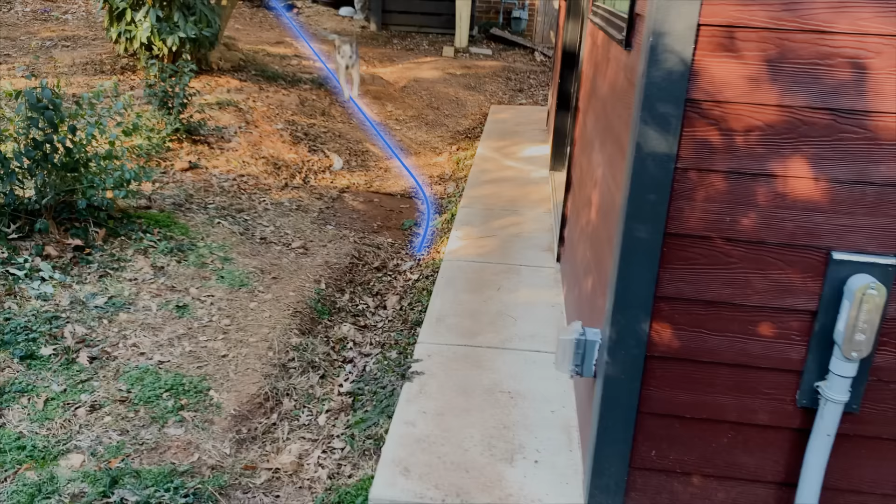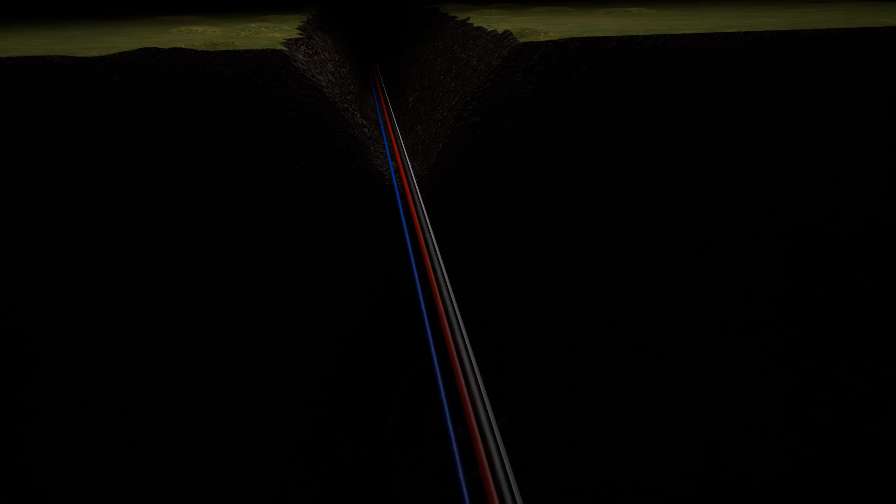My wife and I have just finished building this backyard office ourselves, and today we're going to be covering a very important step: connecting high-speed fiber internet. We'll explore some of the options that were available to us before getting into the details on the products we used and the amount we spent. We're also going to look inside some of the components of a home network, using VFX and animations to help explore their basic functionality. As always, I'm aiming to give you as much information as possible, so you can recreate this project, or at least take some ideas for your own. The final result will be a wired gigabit connection available at both workstations in this office. So let's get started and take a look at how we can integrate into our existing home network.

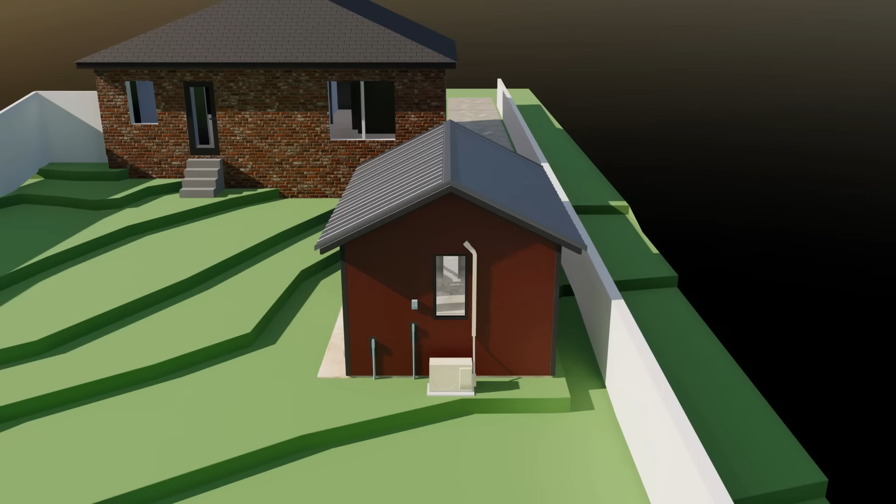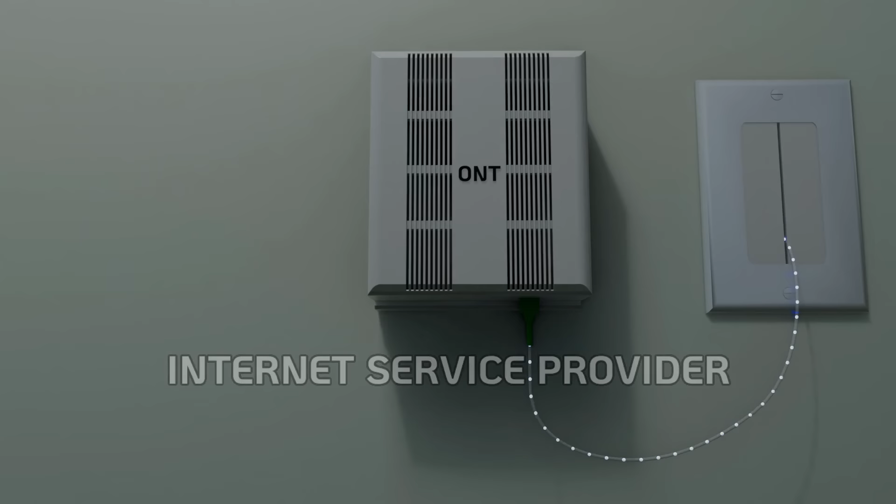Over at the house, we are fortunate to have a gigabit fiber connection with our internet service provider. This feed enters our home through the crawl space and runs to the center of the house, where I have a media closet set up. The fiber comes up through the back wall of that closet and plugs into the first device, the Fiber Optical Network Terminal, or ONT box, which is property of our ISP. This box takes the light signals transmitting over the fiber line and converts them into electrical signals, which can be sent through the copper wires of an Ethernet cable.

The next device is an Ethernet gateway, also property of our ISP. It has two functions. The first is converting the analog signal it's receiving from the ONT box into a digital signal, which is what our phones and computers will use. It also acts as a router, which is what allows multiple devices to simultaneously access the internet.

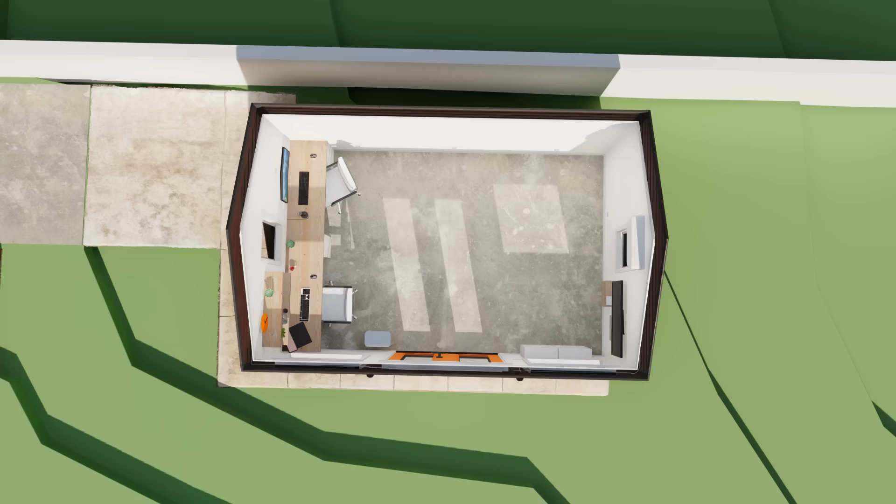For my new office out in the backyard, I'll need to find a way to get access to this gateway. It provides Wi-Fi, but the signal is going to be way too weak to reach a separate building. Let's consider a few different solutions to bridge the gap.

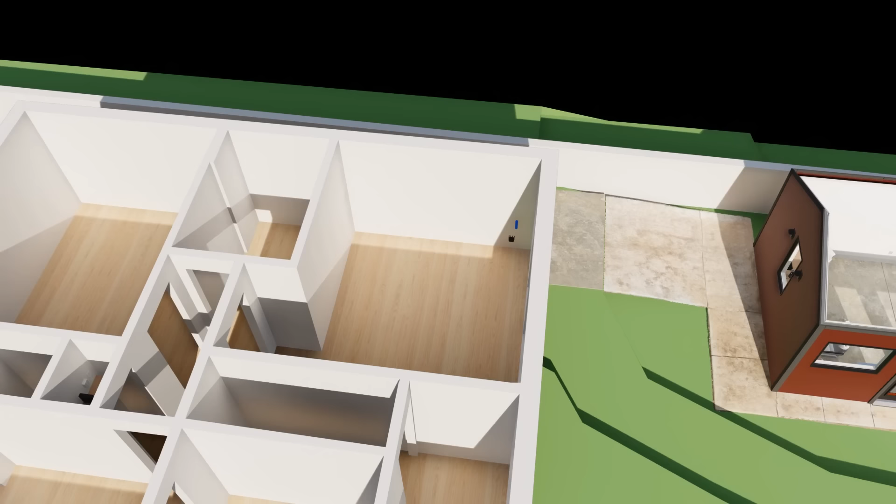The first is a Wi-Fi extender. This device simply takes the Wi-Fi signals it's hearing from the gateway and repeats them so devices further away have a chance to pick them up and communicate back. The downside is we'll see a pretty big reduction in our internet speed. We're adding a middleman, and the time it takes this device to listen and then retransmit will result in a noticeable speed decrease.

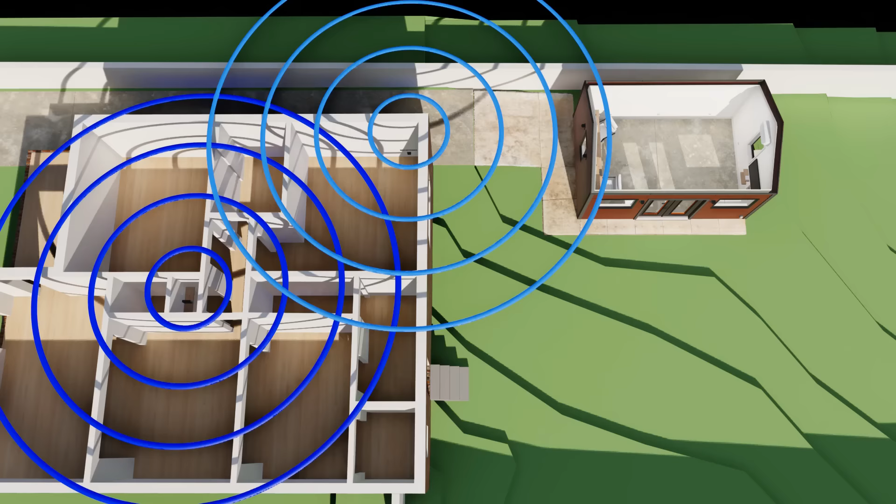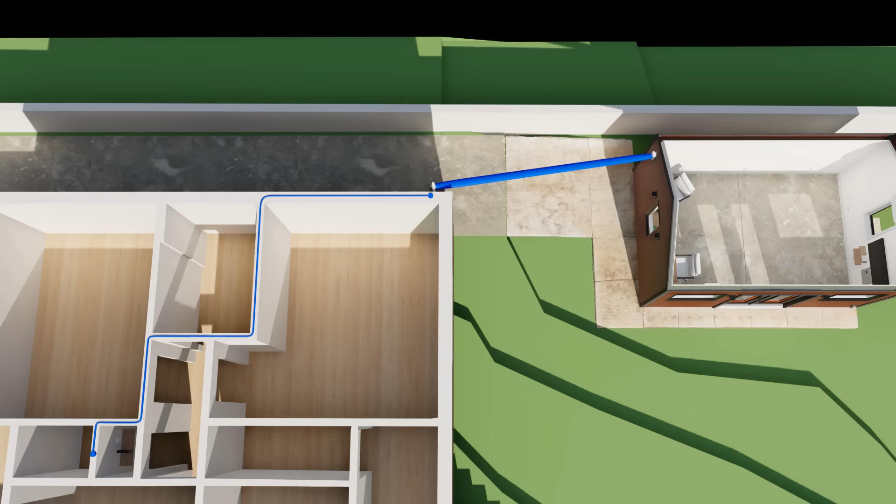The next option is what's called a point-to-point wireless bridge, which is pretty common in a situation like ours where you have two separate buildings. Instead of boosting the strength of our existing network, we would create a separate network out in the office. This new network communicates with the house using a pair of specialized antennas that transmit a focused signal back and forth between the two buildings. This does require a line of sight, but it results in a more robust connection than the extender. While it is an improvement, it still isn't the fastest solution that we have available. And it can also be affected by bad weather.

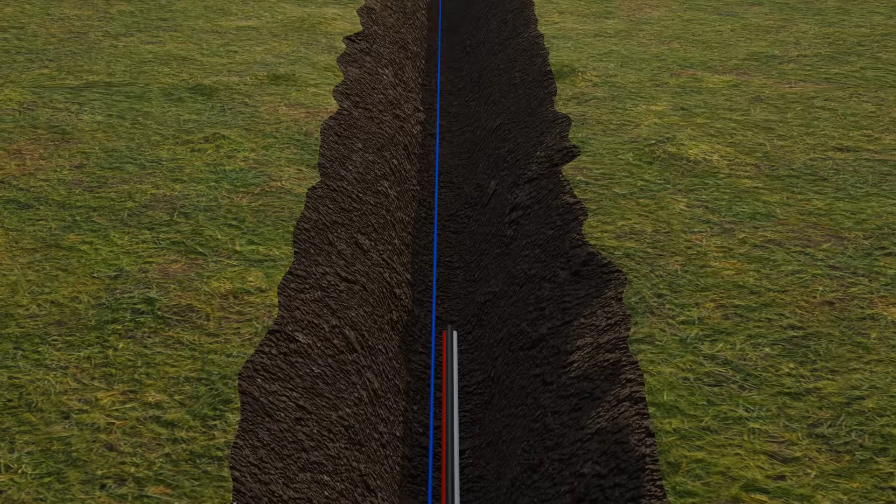A wired connection avoids all of this. If you're already running underground power, why not just take advantage of the opportunity and run a direct Ethernet wire out to the new building? But there's one issue: we don't want to run an Ethernet line right next to a 240 volt power line. When electricity is flowing through a wire, it produces a magnetic field which can induce currents in nearby wires. This is called electromagnetic interference, and it has the potential to corrupt data.

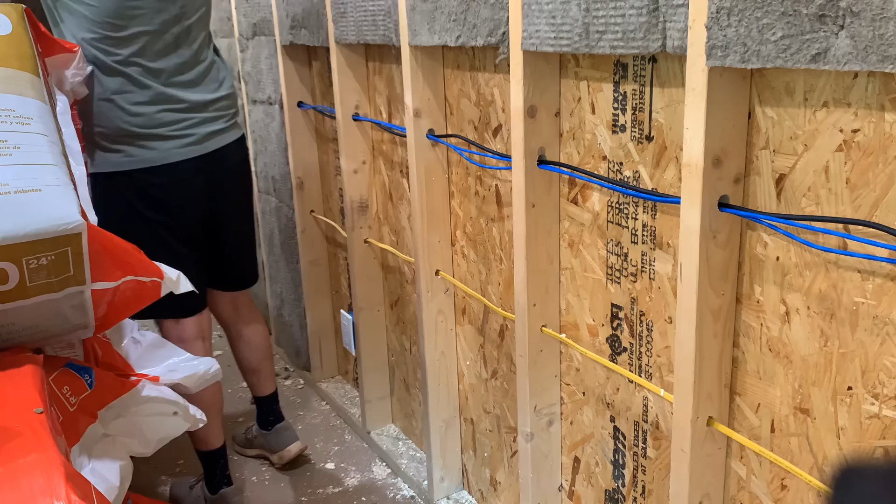This usually isn't a concern when you only have low voltage wires, which is why it's typical to see multiple Ethernet lines placed right next to one another. But it's definitely something you'll want to plan for whenever you're dealing with 120 volts or higher. This effect is diminished as the distance between the wires increases. For that reason, we have the Ethernet in our office walls running 12 inches above the 120 volt lines. But it's going to be difficult to create enough space between the wires in that trench. So what about fiber?

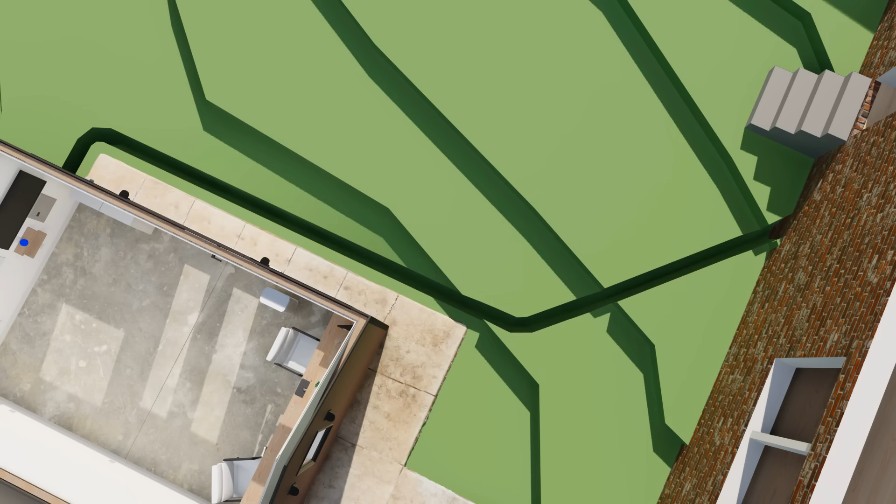Like we said earlier, these cables use light, not electricity, to transmit data. We'll be immune to the interference produced by our power cables, and we can use the same trench we already plan on digging. Fiber will also allow us to take full advantage of the high-speed internet available to us. It provides a much higher bandwidth than copper, so my wife and I will both be able to make the most of the wired connection at each of our computers without slowing each other down. This new line will run from the gateway out to the office where it will connect to an access point.

Now that we've decided on the overall plan, let's get into the specifics on the products that we intend to use.

Hey, could you help me with the project in the kitchen quick? Yeah, we can do that quick.

We're very excited to finish the backyard office, but it's also important to prioritize the simple projects that can have a lasting effect on your health.

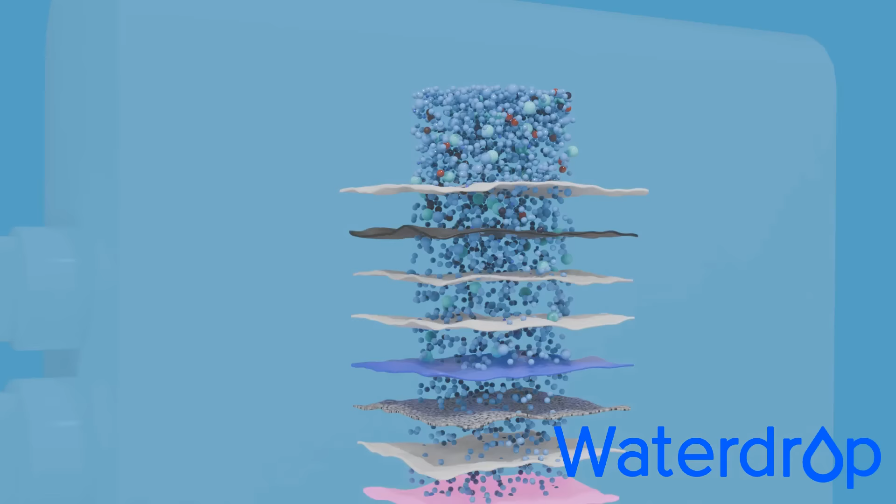We start by drilling a 1-inch hole in the countertop where we'd like to add our new drinking faucet.

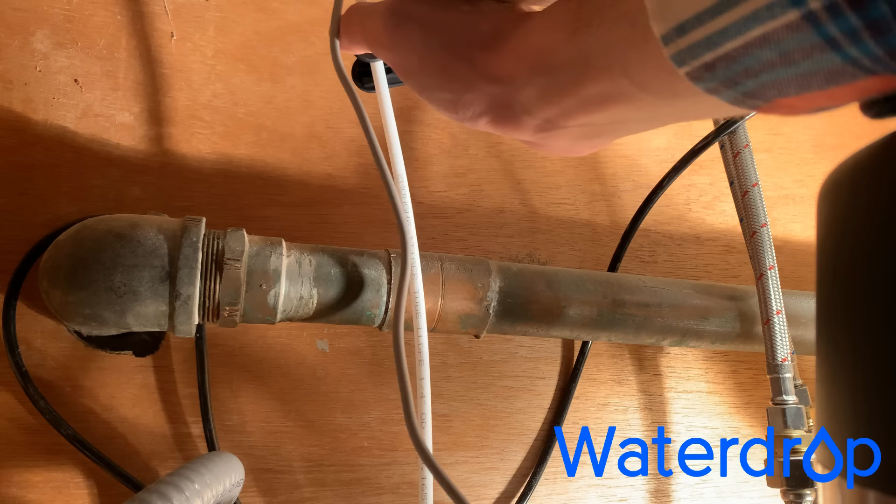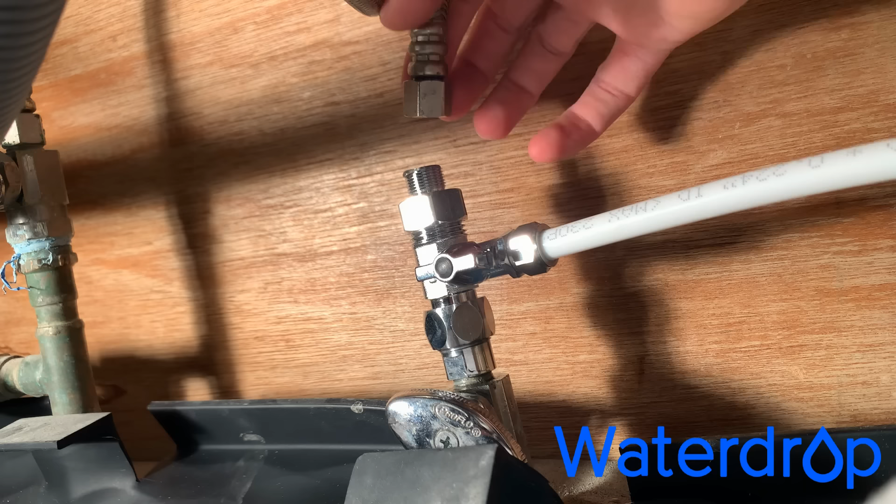Right below this, we'll have our UV sterilizer. This device kills bacteria and microorganisms that might be present in the water. Next, I'm installing this water line adapter, which connects up to our sink supply. You just want to make sure you shut off the water first and let the faucet drain any remaining water. For the filter's drain line, I'm adding this small connection to our existing sink drain pipe.

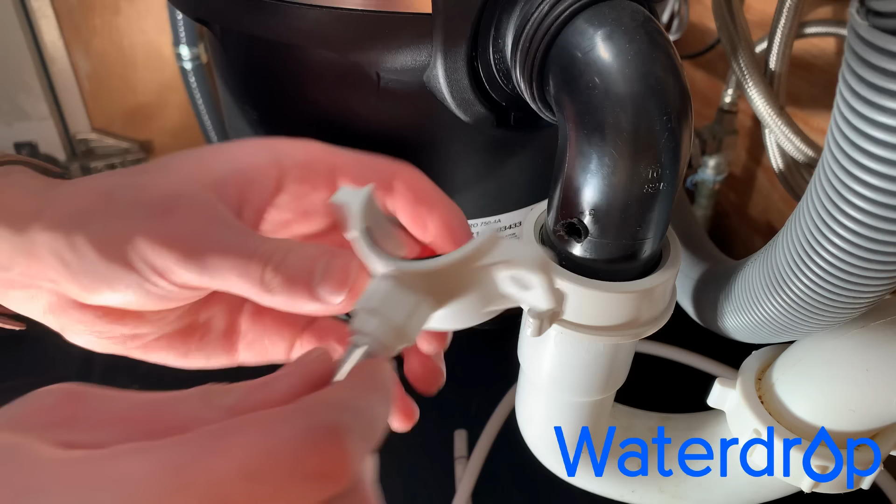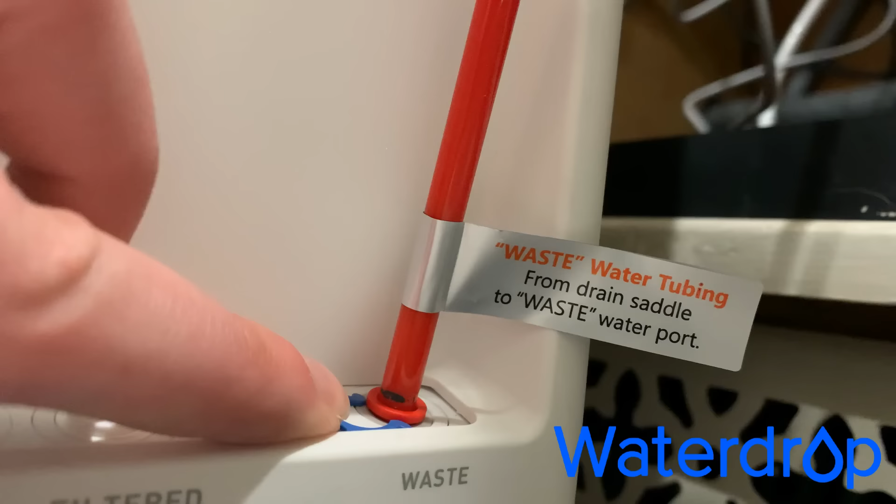Now we're ready to connect all of these components to the main device. It's all very straightforward, with everything pre-labeled and some lines drawn to help indicate when your tubes are fully seated. We then have the cables connecting the faucet and the UV sterilizer.

The device has 3 different filters that are easy to access from the front of the unit. This tankless design is very compact and fits nicely under our sink. We're really happy with this product. The faucet provides information on water quality as well as the status for each filter.

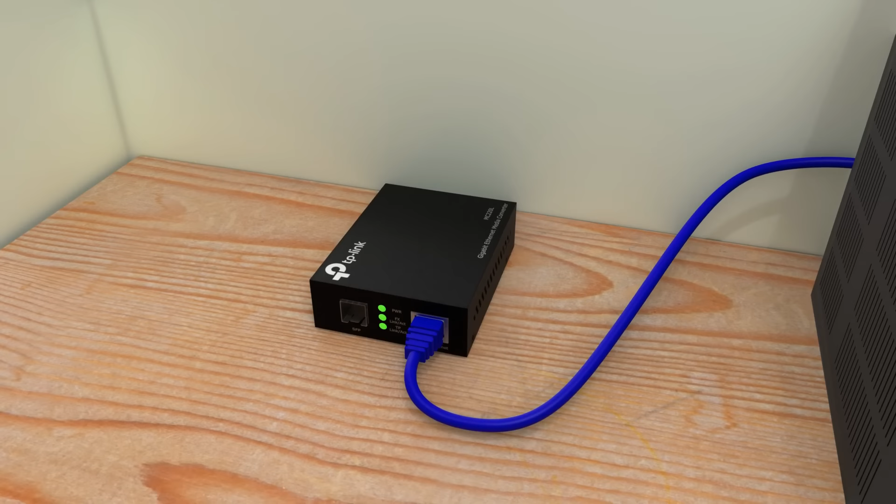Now let's get back to the details of our office network. Starting back at the media closet in the house, I'm going to connect a device to our gateway via Ethernet, called a media converter. Just like it sounds, this device is going to translate the electrical signals into light signals for fiber. The device has what's called an SFP slot, which is where we're going to make our fiber connection.

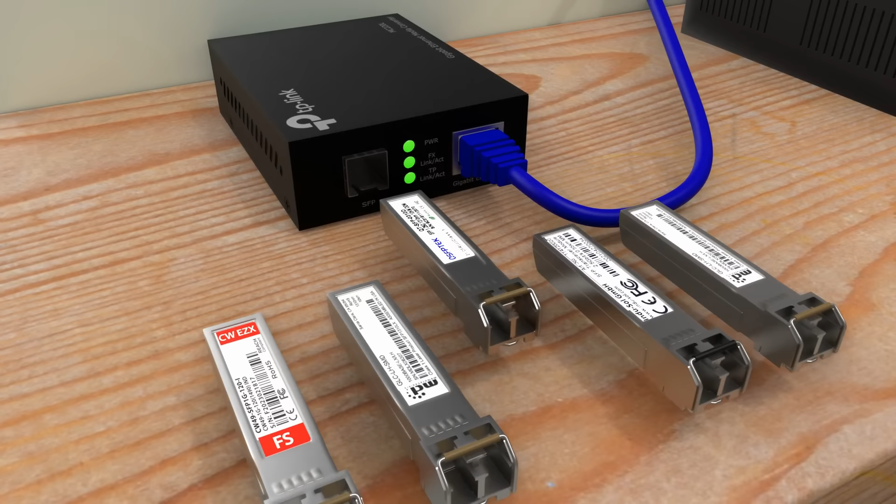When you select the type of fiber that you want to use, which we'll get into the different types here in a second, you'll need to get an SFP module that is compatible with that cable. It sounds complicated, but this module is just a practical way to make one media converter work with multiple different types of cable.

When you're selecting fiber, there's 2 main choices to pick between: multi-mode and single mode. Multi-mode has a thicker core and is designed to carry multiple streams of data at the same time. It used to be less expensive than single mode fiber, but it has a slower transmission speed and can't be run for long distances. Single mode has a much smaller core, allowing the signal to travel further and faster.

The price between the two has become so close recently that it's a pretty easy decision to go with single mode. This is also allowing me to future-proof the setup because the single mode cable can go up to 40 gigabits per second. I'll just have to update the media converter later to upgrade to the faster speeds.

The cable I'm using is an OS2 LC to LC. LC stands for Lucent Connector, and it's the name of this type of termination at the end of our cable. It's nicknamed the Little Connector, and this is primarily why I picked it. It'll be much easier to eventually pull this through the conduit during install.

Going back to the SFP module, now that we know what cable we're using, we can select the right adapter that's compatible with it. This one matches the LC connector and it's rated for gigabit speed. This part, along with every other product you'll see in this video, will be linked in the description below.

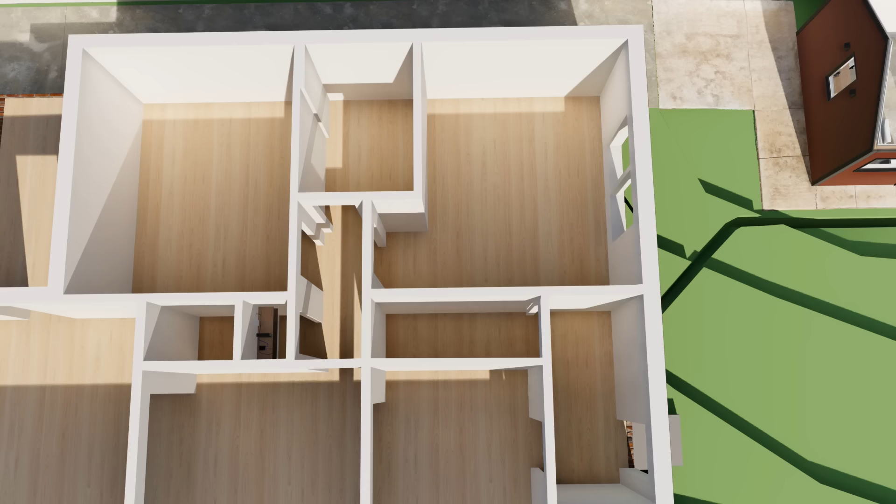From this point, we'll run one continuous fiber line all the way out to the office. Here we have our access point and a second SFP module that's identical to the one back in the home. With the fiber connected, this device can now generate Wi-Fi for the space. It also has a couple Ethernet ports, so we can connect the lines I ran inside of the walls while I was building the office.

So now let's jump to the actual work. First step is digging the trench and installing our conduit. Luckily, this was already done last summer, so I'd be ready to pull the fiber as soon as I finished building the interior of our new office.

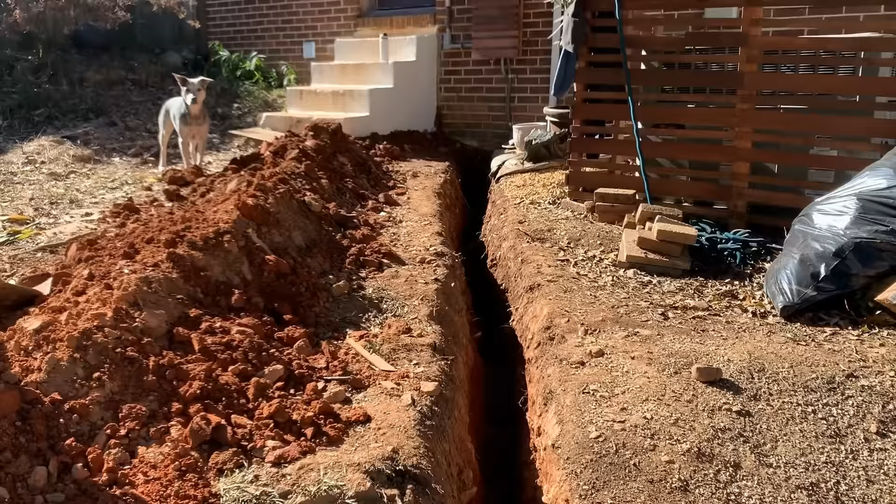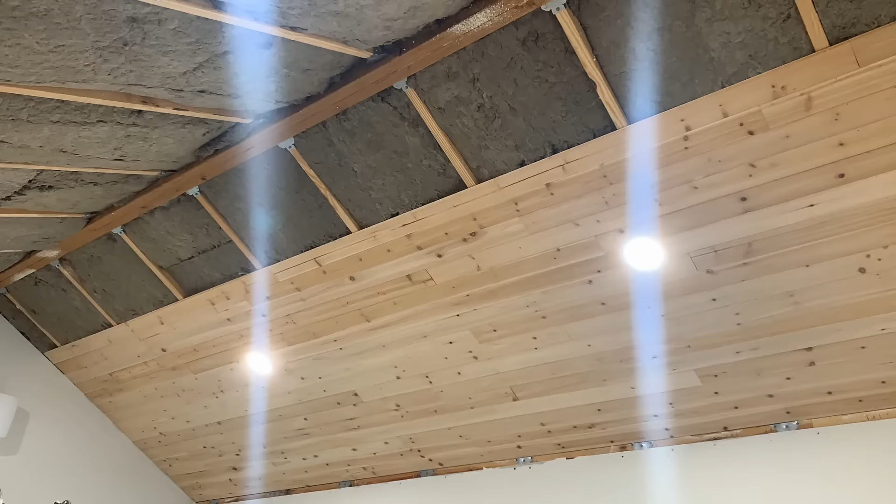I went with an 1.5 inch conduit for the power, and I have a separate 1-inch conduit run for the fiber. With that already installed, we're going to first pull a string through the conduit.

I'm going to get this in place by tying one end up in a plastic bag, and then I'm going to vacuum that line out the other end.

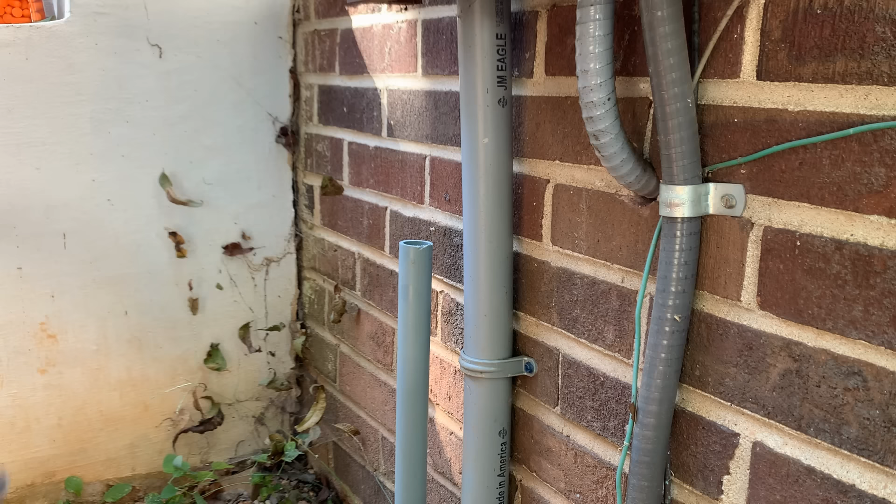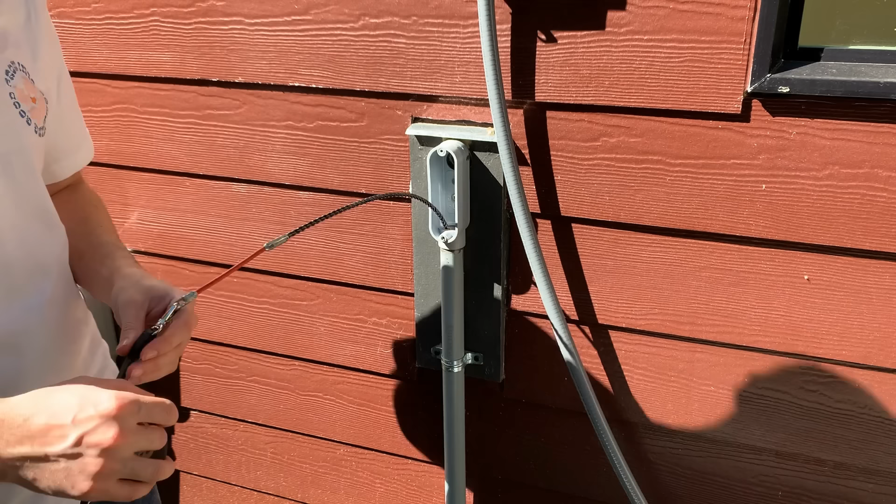Now I can use that string to pull a stronger wire fish through the conduit. Once we have that out to the other side, I can finally attach our fiber and get ready to pull it through. The cable I purchased came with a specialized pulling assembly attached.

It's got a clip built in and a little bit of a heavier jacket to help protect the cable from snapping. We'll also use some electrical tape to cover any features that could get caught up on the inside of the conduit.

Once we're all the way out to the other side, I'm going to pull all the slack out to that end so I can place the extra cable hidden away in my crawl space.

To get into the crawl space, I'm going to drill through the brick using a 1-inch masonry drill bit along with a hammer drill. Then I can mount another LB conduit elbow to cover this hole.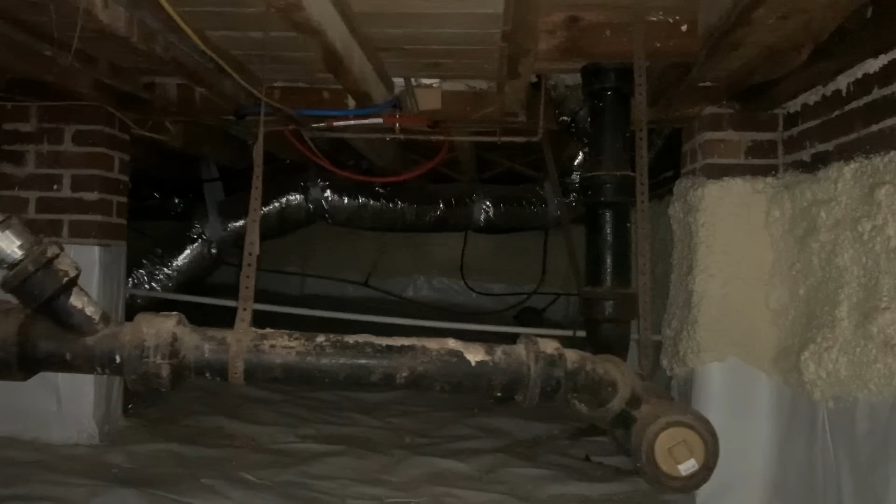Then I'm getting into my crawl space, which isn't too scary since we had it encapsulated a few years back. And then I'm going to finish by getting our cable all the way back to the media closet.

Here you can see the media converter with the SFP module and fiber connected. This is now tied into the gateway.

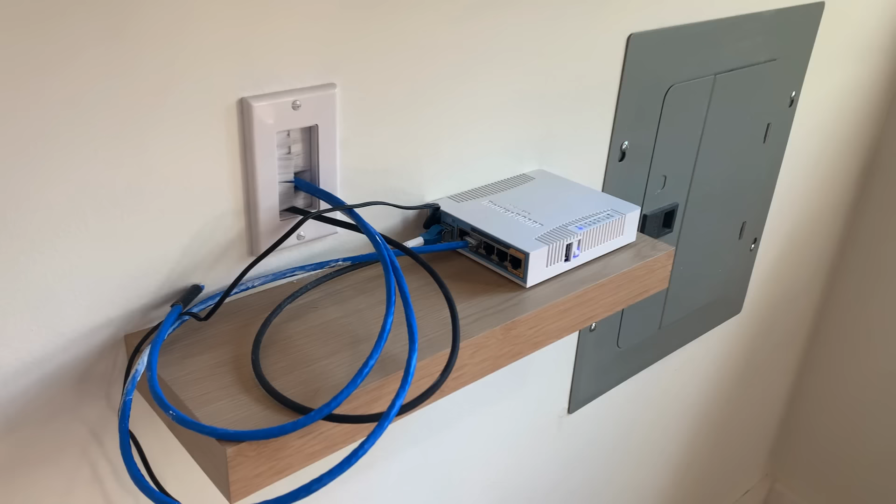And then back out in the office, I have our access point installed and one of the 2 Ethernet lines connected. The second Ethernet line is going to feed my wall-mounted PC, which will be an upcoming project here very soon. But let's run a quick test on the line we do have connected.

And there we have it.

I think this was totally worth the effort, and I highly recommend adding an extra conduit if you're ever trenching on a project like this.

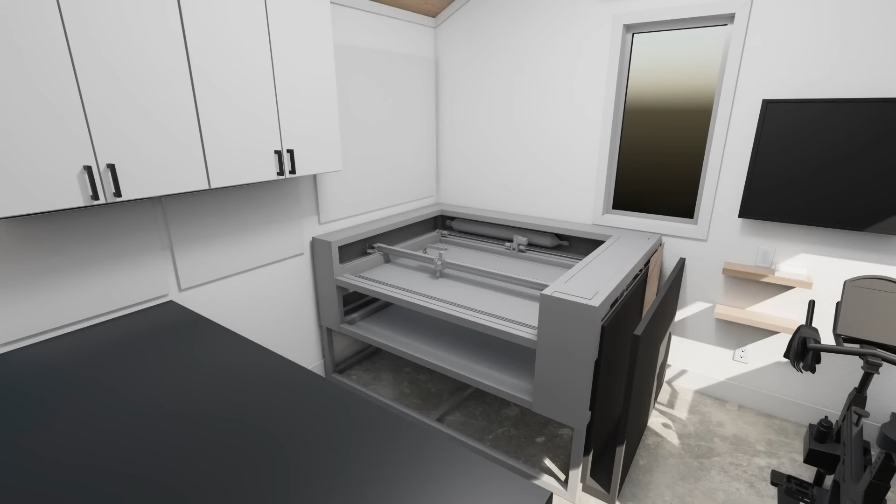Next on the channel, we're gonna continue to fill out this space. I'm building a work table as well as a new custom laser cutter. We also still have all of the final landscaping for the backyard and plenty of other projects to get to.